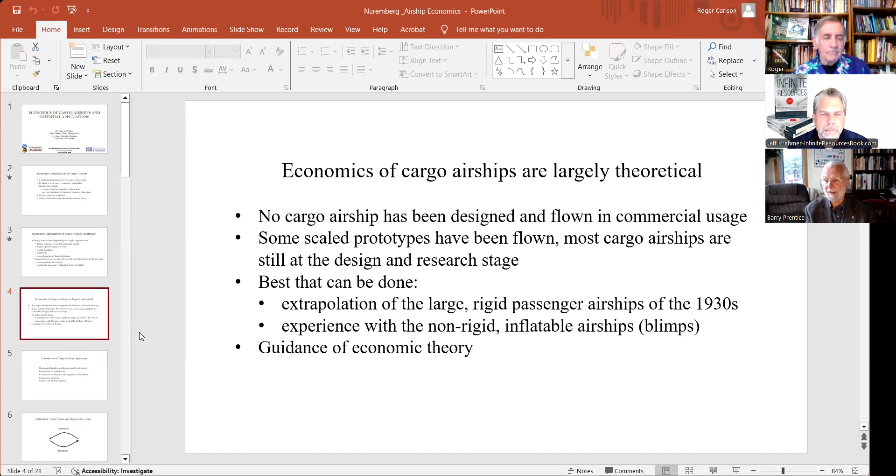Also some experience about the non-rigid inflatable airships, the blimps - the Goodyear blimp is an example of that - and then some guidance from economic theory. So just a caveat in terms of what we can say about airships in terms of being precise. We know approximately, but we can't say precisely because, again, they're not there yet.

So revenue depends on utilization and cycle times. Cycle time is a term used in transportation where you're looking at the full time it takes to leave your destination with a load, drop it off, pick up another load somewhere, and return back to your home. That's a cycle. It depends on the sorts of business you have, but the number of cycles you can do in a year determines the total revenue you can get. So utilization and cycle times are key to how much revenue you can earn.

In terms of your costs, a lot depends on the size of the vehicle. The bigger the vehicle, typically, the lower the cost per ton mile of carrying goods. A ton mile is used as a way of comparing transportation systems - so what is the cost of moving 1 ton 1 mile, or moving 1 kilogram 1,000 miles would be the same. So in any case, the economies of size - I'll return to that concept in more detail.

Economies of distance and negative externalities. There is an issue about distance because you have terminal costs, your loading and unloading, as well as the movement in between, which is called your line haul. Those costs add together to give you your total costs. Then you have negative externalities, which the firm almost by definition doesn't pay for - these are costs borne by society, typically pollution and congestion. So you don't pay anything for congesting the highways, except you're slowed down yourself. And in terms of carbon emissions causing greenhouse gas effects, you don't pay for that right now either.

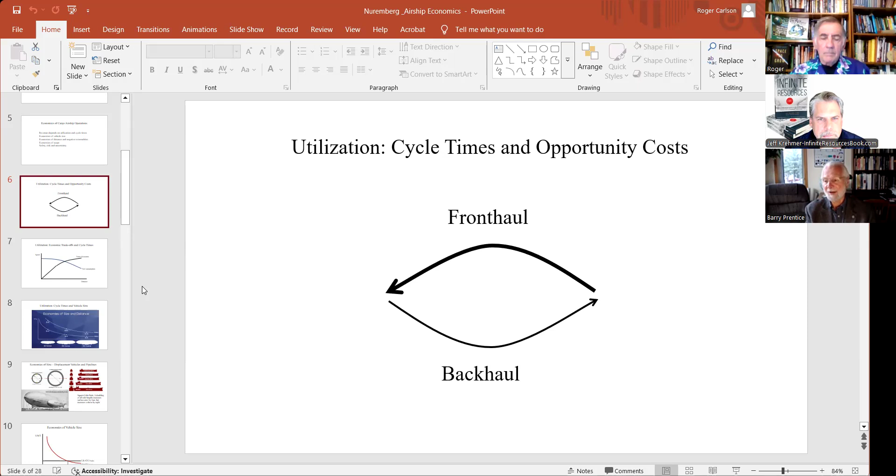Railways tend to do this because it's very hard to find return loads for a lot of the rail equipment. So a lot of rail equipment goes one way full and comes back empty, but it's easier for them because they're mainly capital costs - fixed costs, with fairly low variable costs. So coming back empty means lost utilization, but not a lot of direct costs. Trucking, of course, is the opposite - mainly variable costs, so the front haul back haul balance is very important for trucking. I'd say airships are about in the same category as airplanes.

If you have to load on more fuel, you can't load as much cargo. So the faster you go means less freight carried as well as less distance covered. There are some really interesting trade-offs in terms of operations in figuring out the appropriate speed for an airship, and this depends a lot on the commodity being moved and the capital cost of the airship.

And I was going to say, you have a third dimension: cost. The slower you go, the more cost, the less utilization you get, and therefore more capital cost. That was the thing that killed the shuttle—it sat in the hangar for six months being refurbished. A smaller version of that question would be whether you go 60 miles an hour or 80 miles an hour.

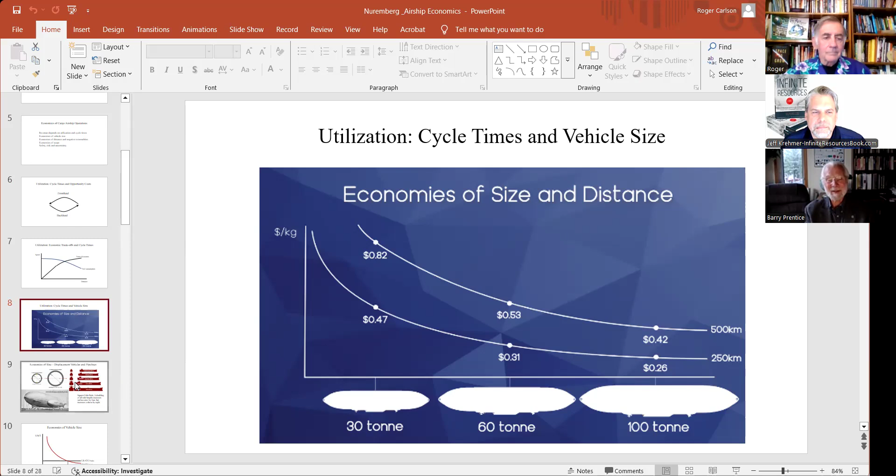This illustrates the principles of economies of size, especially for displacement vehicles. On the right-hand side you can see the size of tankers: a coastal tanker at 205 meters carries about 25,000 tons. The Aframax at 245 meters, about 50,000 tons. The Suezmax at 285 meters gets to 100,000 tons. At 330 meters you get 200,000 tons. And finally the ULCC, the ultra-large crude carrier, gives you 400,000 tons. So the economies of size in any displacement vehicle are really important, and bigger is always better.

On the bottom is a historic shot of a Goodyear blimp beside the Graf Zeppelin. The Goodyear blimp is about 200 feet long, and the Graf Zeppelin is a little less than 800 feet long. The blimp would lift maybe 2 or 3 tons, and the Zeppelin 70 tons or more. So you can see size really has a strong impact.

There's also an interesting issue with regard to materials. The top left is a pipeline, and the same principle applies: the bigger the pipe, the more you carry. But you can also see that the width of the walls increases as you get bigger. That's called hoop stress, which is why blimps, which have no frame, are really limited as to how big they can get, because it's just a question of how strong the material is. The bigger the diameter, the greater the stress.

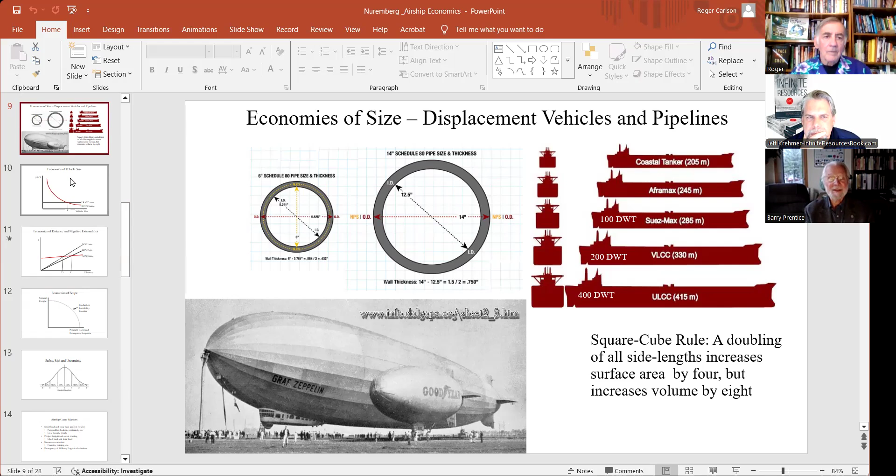But with size, the trucks are basically limited by the dimensions of the roads and bridges as to how big they can get. The airships, we don't know how big they can get. We know that 87 years ago they reached roughly 100 tons of lift. With today's materials engineering, would 200 or 300 tons of lift not be possible? And if so, would they still not compete with trucks? Well, we know they won't compete on short distances, but would they necessarily not compete on long distances?

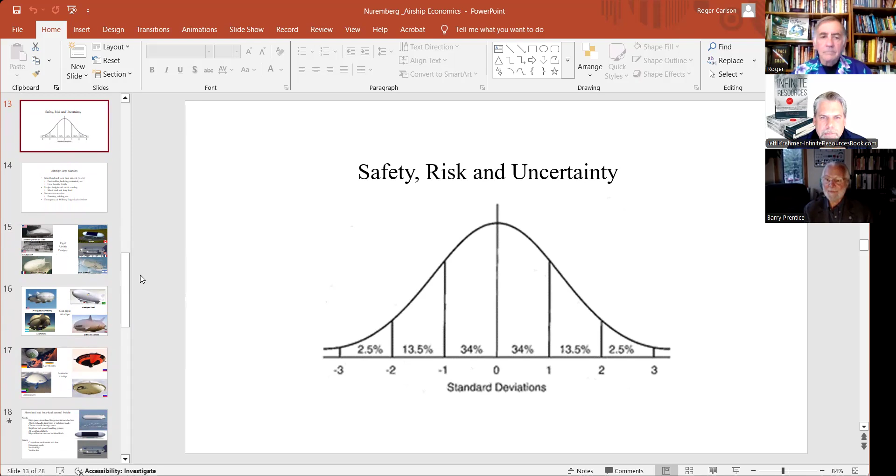Next, please. So now let's look at some airship markets. How do we apply these principles to the various designs for airships? In terms of cargo markets, I'm looking at 4 different types of markets: short haul and long haul general freight, so perishables, building materials, etc., as well as low density freight.

One of the things people don't appreciate is that most trucks on the road are actually underloaded. Even though they may have a 52-foot or 53-foot box, they still cannot necessarily reach the full weight, depending what you're shipping, because a lot of things have a lot of packing around them and have gotten lighter. Think of a wall-mounted TV, a thin-screen TV. I bought one recently and was surprised at how light it was, but even more surprising is that the box it came in was at least 4 times the size of the TV because of all the foam packing around it. If you're shipping that product, you're not going to get a full truckload.

With an airship, your only limit is weight, simply because they're so big in general. There's always lots of cargo space. So they are very good for low density freight, not so good for high density freight because obviously they're limited by weight. They can move it, but other transport is better if you have it available.

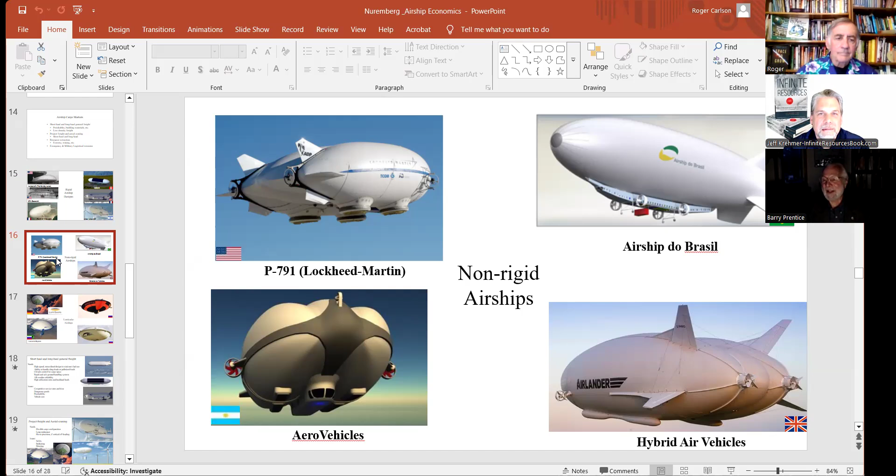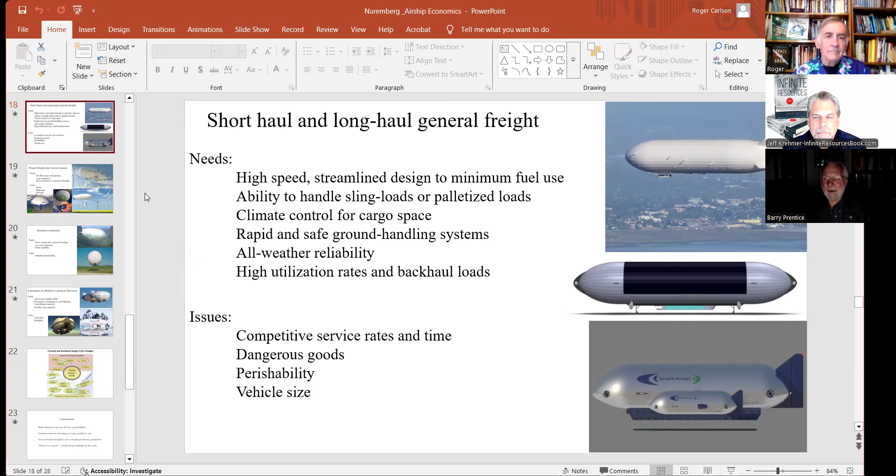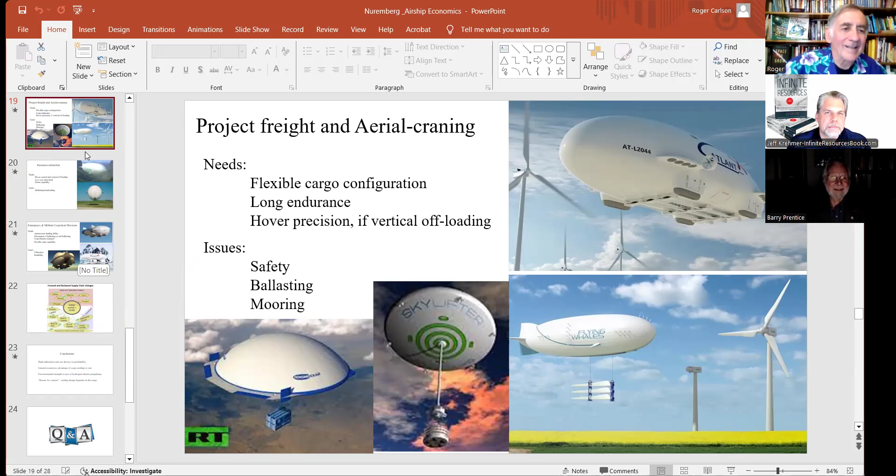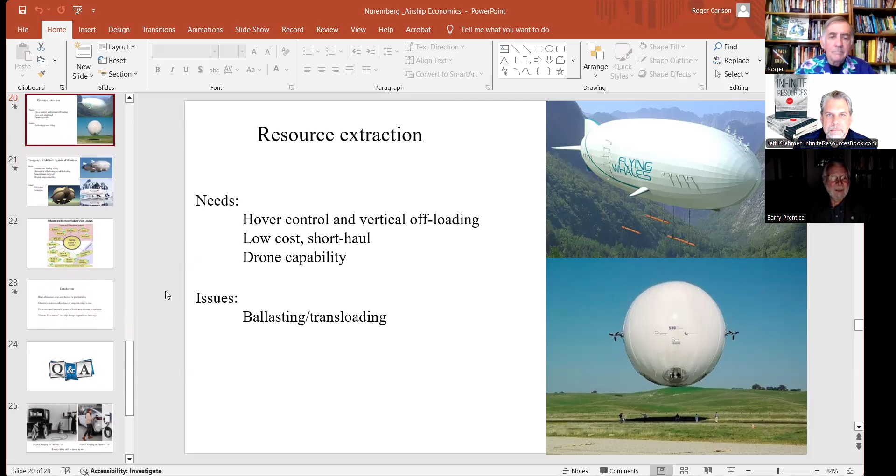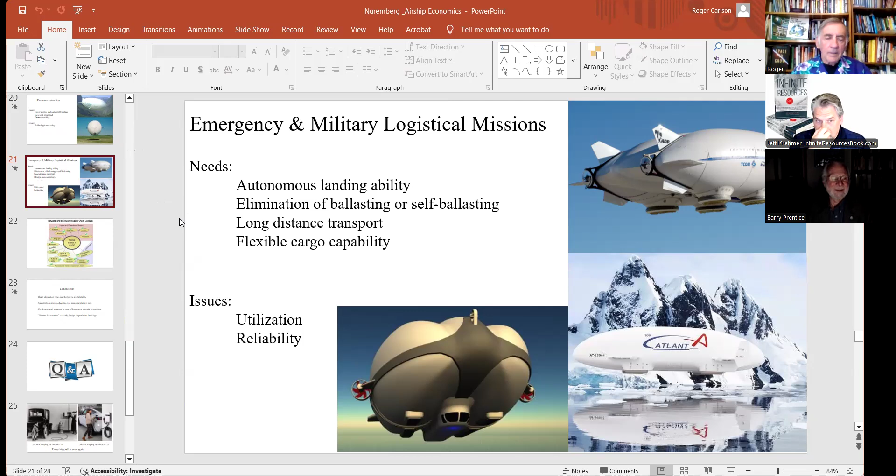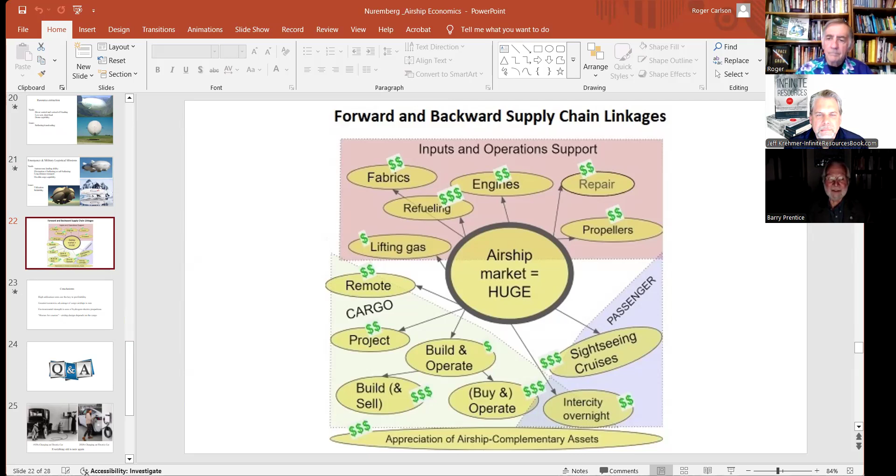You mentioned lifting gas in that last thing. Are you going to talk a little bit about hydrogen and helium? Yeah, I think a lot of people have this vision that hydrogen is so dangerous that we can't use it. It's not true.

In the first place, the physics of hydrogen - you need to have a 4% concentration in the air for it to ignite. By comparison, gasoline will ignite at 1% concentration of fumes. So gasoline is much more dangerous than hydrogen. Plus gasoline is heavier than air, so when you have a gasoline leak, it hangs around at your feet, and of course it can easily ignite in the concentration you can reach. Whereas hydrogen, as soon as it's released, goes straight up. So unless it's captured in some crevice or whatever, you're not going to have the concentration to ignite. It's actually quite hard to ignite - people have tried in different experiments.

The other thing is, if you go back to the 1930s - 80 or 90 years ago - people didn't have the technology we have today to be able to detect hydrogen. They knew it was dangerous because they'd seen it - it burns very rapidly, which is why you get an explosion. It's like a dust explosion, same principle - the combustion is so rapid that you get an explosion. But of course, how do you detect it? You can't see it, you can't smell it, you can't taste it. But today you can buy a handheld sniffer for $150 on the internet that'll pick out parts per million. In the case of hydrogen, it will not ignite at less than 4 parts per 100. So as soon as you start detecting hydrogen, as long as you ventilate an area, you can't have an explosion.

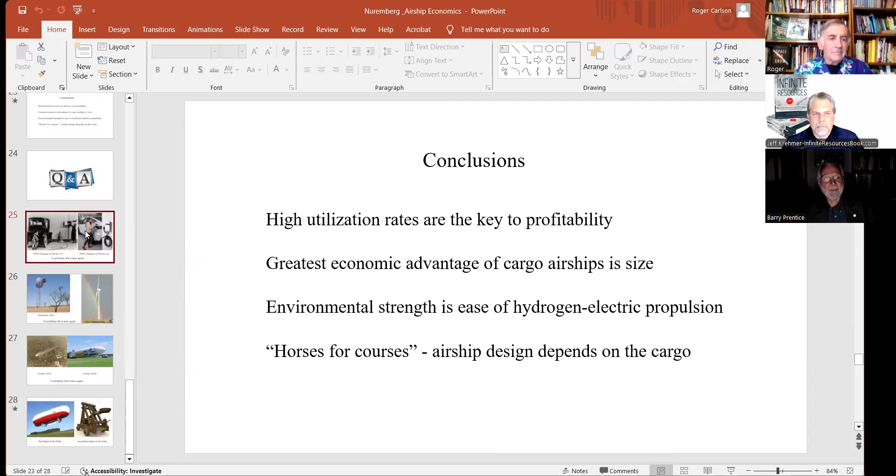If I could move down, I've got a couple of slides at the end I want to show you. I like to point out to people that in the 1920s, electric cars were available commercially, and they were beaten out by gasoline cars - better range, better performance, and fossil fuels were cheap. There were lots of reasons for that. But today, you can see this is probably that little girl's great-granddaughter charging up an electric car in her garage, and electric cars, notwithstanding some setbacks we're seeing, are still coming forward, and that's likely the way we're going to move into the future. So electric cars are back.

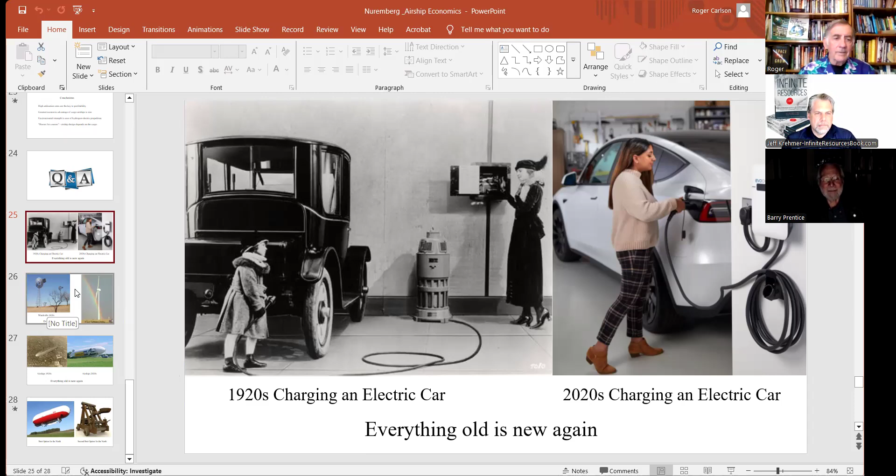The one beside it - two American Zeppelins did crash with loss of life. Yes, the Akron and the Macon. Actually, three - the other one was the Shenandoah, which was a big Zeppelin. But again, a lot of this had to do with storms. Every one of those was in a storm - a thunderstorm for the Shenandoah, and a very bad storm off the Atlantic for, I think it was the Akron, and the Macon off of the Pacific.

One of the things people don't realize is in those days in the 30s, 15 minutes after they left the port, the pilots had no idea what weather they were running into. And if you run into a thunderstorm with an airplane today, you're going to be coming down too - you don't go into thunderstorms. And so the airships today, their safety record would certainly be a lot better.

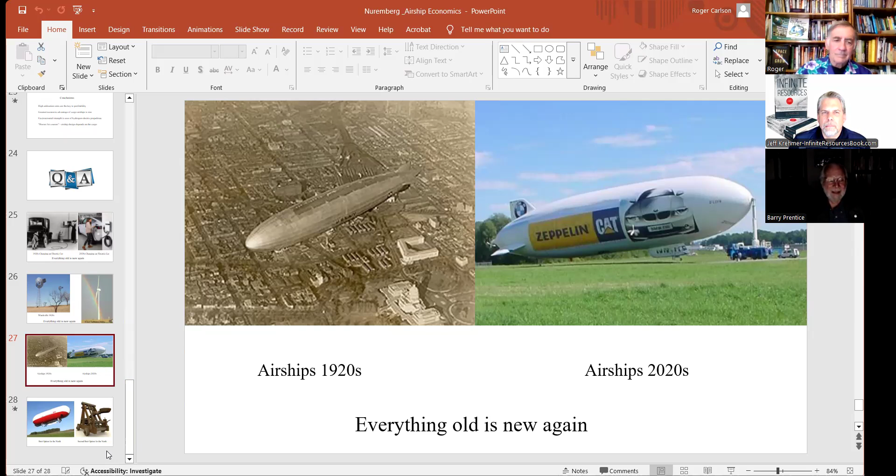Over time, the idea has certainly gained more currency. We're now at the stage where I think the money is going to be put forward to find out, will this work or not? And I'm sure it will. I mean, they've been working on it for 100 years. It's not an anti-gravity device that you have to wonder if it'll work. We know it'll work. It's just a question of whether it's economic.

And now it's actually more than 100 years. There were dirigibles dropping bombs on London in World War I. I think it was around the turn of the previous century for the first Zeppelin. So yeah, it's 125 years. I mean, it's overdue. I think we would have done this 50, 60 years ago.

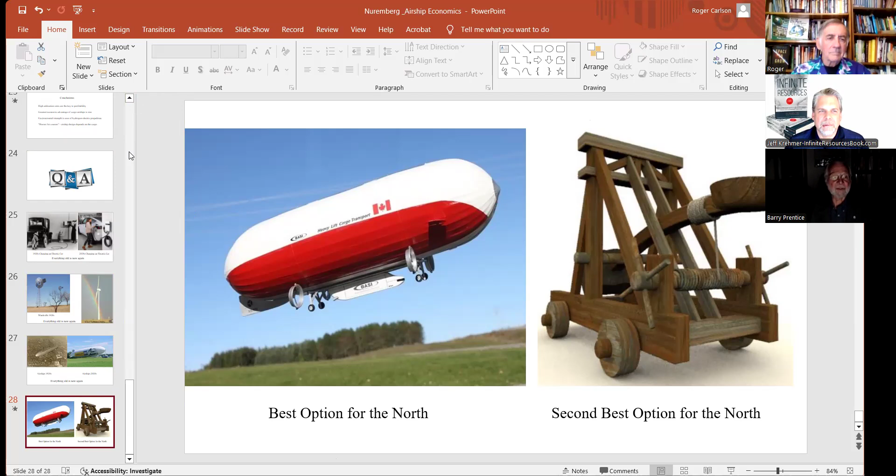Maybe we could stop this and let me talk a little bit about - actually, let's go up to about the fifth or sixth slide, maybe a little further. Let's see, here's 5. Oh okay, sorry, come down past 10. Keep coming down, here's 10, 11. Next one down, maybe 2 or 3. I'm looking for the airships, the one with a picture. That's the one, the first one with the airships.

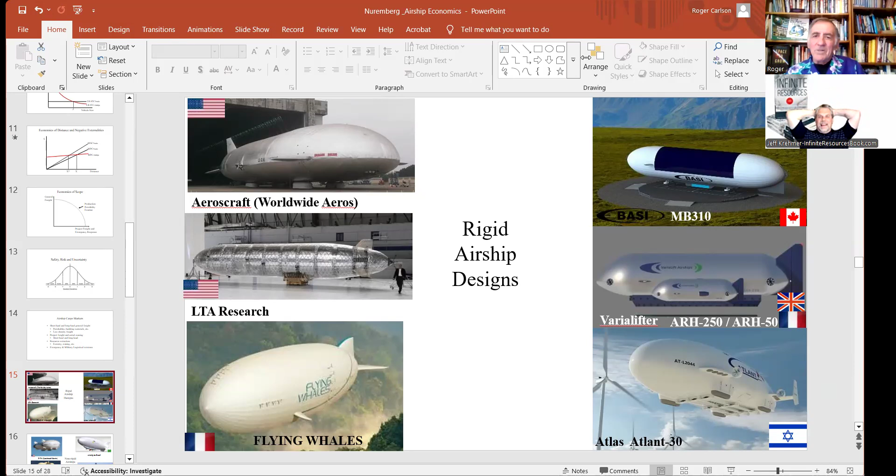Yeah, almost 2 hours. That was great. Oops, oh, I guess I'll stop the recording. Stop sharing — we're just chewing the fat now.

And I'm sure, Roger, you're still recording as far as I know. Oh whoops, oh gosh, I'll have to cut this off. Why is it — I thought I said... You stopped the screen share, but it still says recording at the top. Let's see, yeah, it does. Oh, why don't I end the whole thing? Pause, stop recording. There we go.